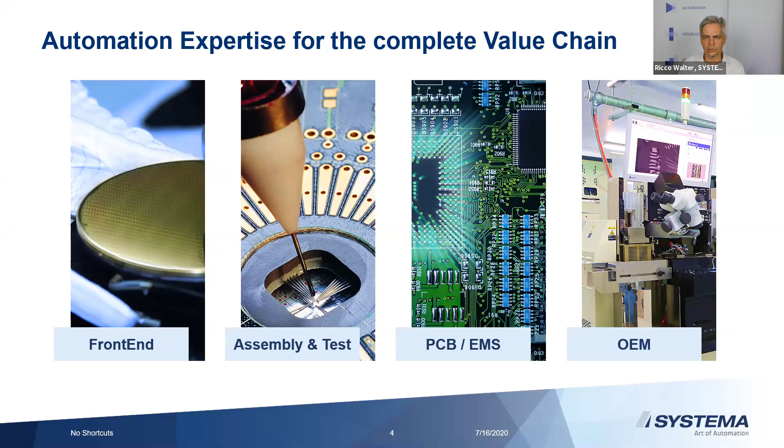Having said that, Systema was born really in the front end of manufacturing. We started and learned the hard way and climbed the ladder, moving to other areas like assembly and test, the back end. Then even further on to PCB and electronic manufacturing services, and finally also supporting equipment suppliers around the world with sophisticated automation. So everybody at the moment is talking about revolution.

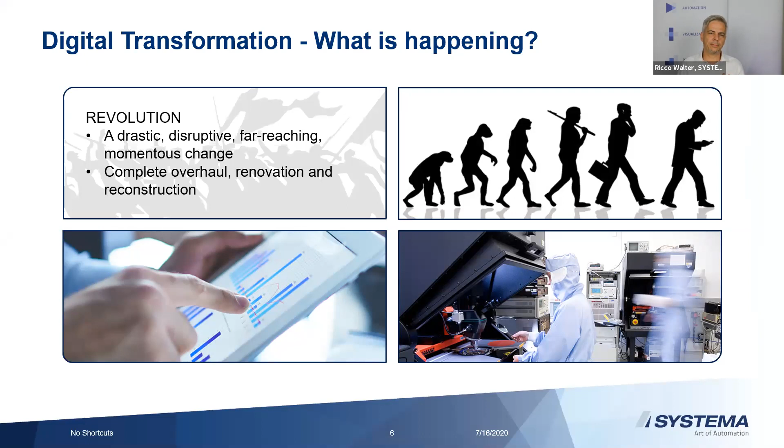I'm a bit careful about it. Let's get a little bit deeper into what's going on. No doubt there is digital transformation going on, with a speed and power which is simply overwhelming. If we talk about revolution, we talk about a drastic change. Things are really experiencing a complete overhaul, a deconstruction and a reconstruction. This is something very dramatic.

Well, an evolution is more a gradual change. So you start to adapt, you progress, you improve things in an existing environment, so it takes longer.

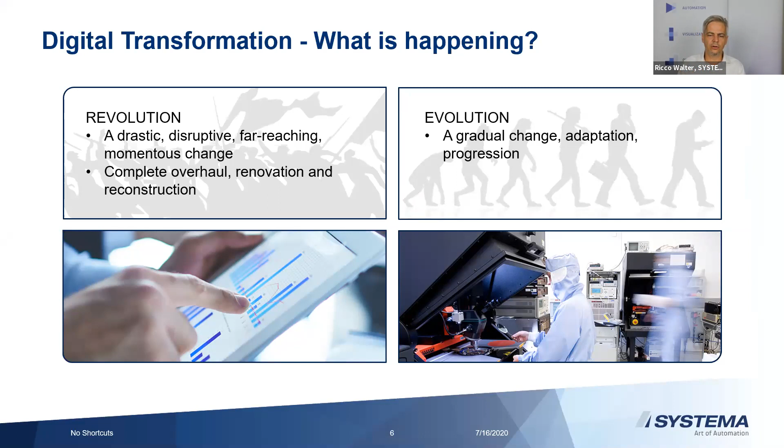And then we have the reality in manufacturing. Basically we have existing fabs and factories. If you go to the shop floor, what you see is people, you see paper, and you see a lot of Excel in there. The worst thing is, you can't simply switch off a factory to do some nice automation work. So everything has to be done in a running factory, which might be hard and challenging.

And we see a lot of temptation right now. Like TK already mentioned, there is really a complete new set of tools and toys like AI, machine learning, IoT stuff. Computing power and storage gets cheap, and that is really a game changer. You can do much more things today than just 5 years ago. Everybody's expecting information at your fingertips. Funny thing about this one is this phrase is from 1994, from Bill Gates giving a speech introducing Windows 95. So already at this time, this was a hot topic.

So what are the challenges we see? Manufacturing has changed dramatically in the last years, and there's a common understanding that the fabs are already too complex to manage or optimize manually anymore. The complexity in the fabs is really increasing, and we see a transformation from mass production to mass customization. Product mix is going up, lot size is going down.

On the other side, to be frank, working in manufacturing is not really sexy. So we have really a challenge to get the right talents in there, and we cannot always rely on the industry veterans who know everything and have been doing everything for the last 30 years. These people are simply retiring.

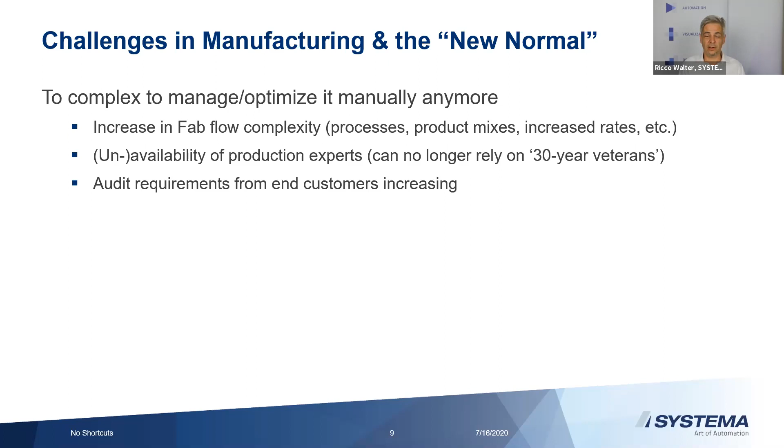Another thing is we see really that the requirements for audit from the end customers of the fabs are increasing dramatically. But this is not the worst part. What is happening right now is that the COVID situation is a big boost for digital transformation.

Simply, all of a sudden, you can't have all these operators on the shop floor. So people are missing who were doing a lot of work there. And working from home means you have to monitor and control your manufacturing remotely. This is really mission critical.

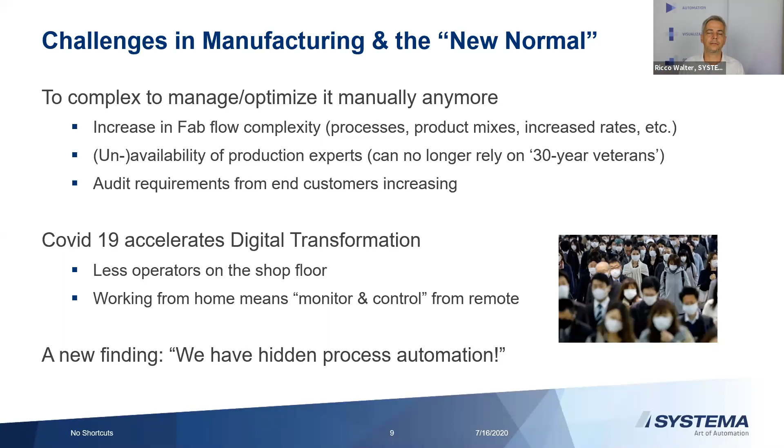What we see from our customers and the feedback we get is really a finding of, holy cow, we have hidden process automation. If you go to the shop floor and watch the operators and engineers carefully, you see they're doing something which is never documented, not really in the MES or other systems, because they have the expertise. They're waiting for the next lot, which they see at the previous process step, and so on. This is something you have to keep in mind if you really want to do automation.

So what's the talk of the town? Let's take a short look. Bing, there is some light. What is this light standing for? People are talking about the lights-out fab. Don't get this wrong, we had slides about the lights-out fab in our vision 20 years ago, and people were just like, yeah, that is the future. Today, this is happening and it's accepted. This is really a big game changer for everything we are doing and also what our customers are doing.

So what do we have to do? Of course, it all starts with integration. If you want to automate and finally get to the point that you can turn off the lights, you have to integrate the shop floor. And integration really means not only the equipment. Integration on the shop floor always includes different parties.

Equipment for process and measurement, that's understood, so everybody does that. But if you want to go into real automation, you also have to integrate transport and storage devices. You have to integrate all the toolings you need for the process. You have to bring the puzzle pieces together from the MES, if you have a dispatching component, recipe management, SPC, run-to-run control, whatever is needed. But don't forget the operator. There are people on the shop floor, and to make sure the manufacturing runs smooth, you have to integrate them. And of course material, not only the lots, but also all the direct and indirect materials.

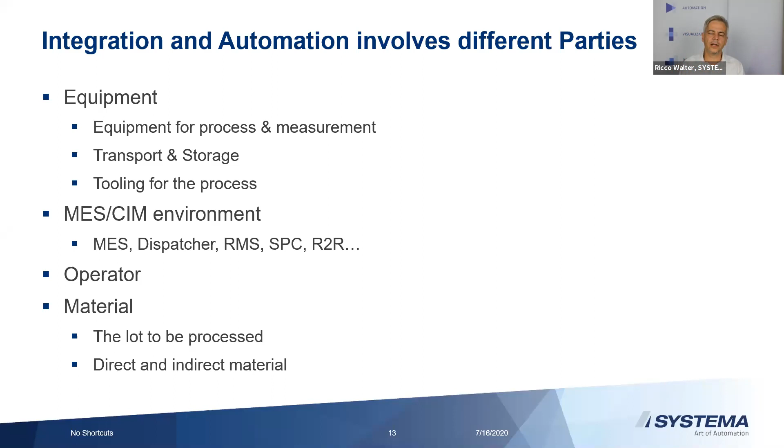So let's take the perspective of the shop floor. This is how it looks like in a lot of shop floors around the world, in Asia, wherever.

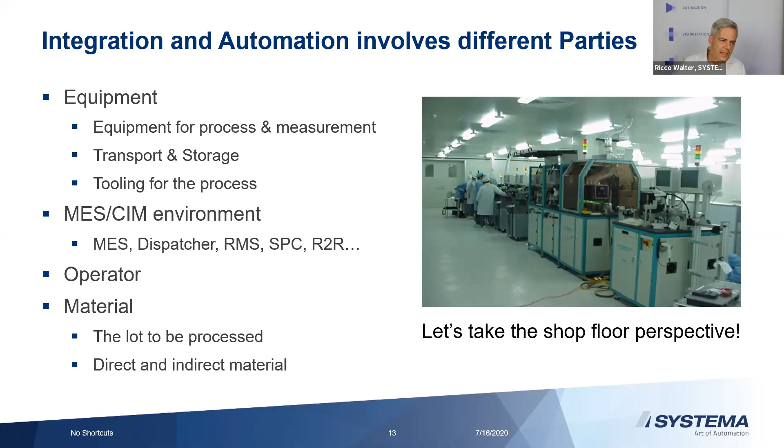So let's look from the shop floor how automation looks like. You have a lot of tools there. You have some people walking around there. You have readers, you have the material down there. And above you have a fuzzy thing, a cloud.

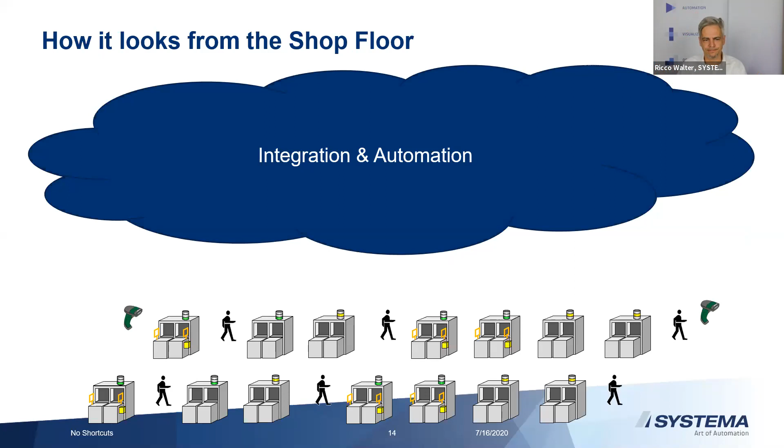So with all the automation integration in there, what you always see on the shop floor are the operator GUIs, the graphical user interfaces, where they get their instructions, type in things. This is always a given, this is always existing. In the better case, you already have machines integrated in a basic mode, so you can read information from the machines, get data, but perhaps not control it or optimize it. And in the best case, you have machines really tightly integrated with the ability to set up recipe parameters, do some remote control, and really be prepared for high automation.

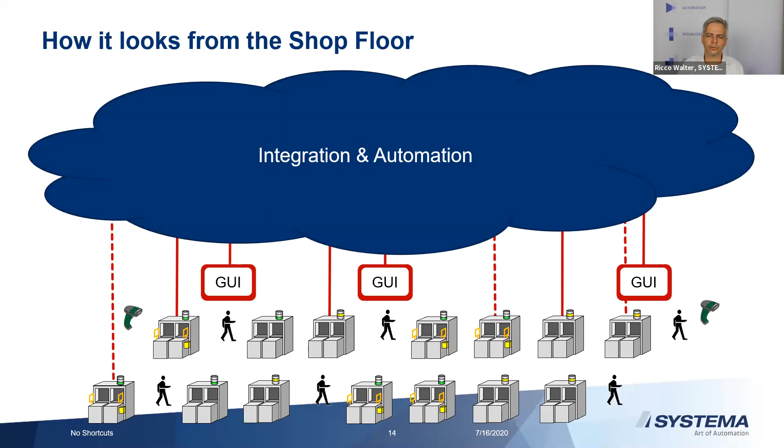But don't forget, such a standard shop floor GUI can do a lot of things for you if it is done well and integrated tightly into the MES. First of all, there's a golden rule: an operator should never search for anything, should not search for what is the next lot, what is my next recipe, what is the state of my tool, and so on. This should be provided via the GUI.

Of course, it has to be integrated into the MES, for the WIP tracking, so you can also integrate some ID readers in there. You can integrate it into recipe management, even though there are still some gaps if you can't control whether the operator really selected the right recipe. You can integrate it into plant maintenance, and you can already feed a simple version of the digital twin for the equipment. And what does it mean?

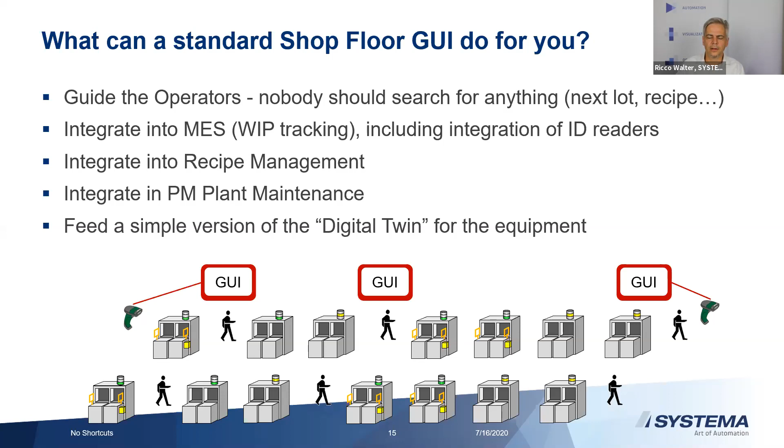Just let's take a look behind the scenes. This is what we call an automation layer. There are different ways of how you can do this, but this is always the backbone of all the automation you have to do in the fab. You see the GUIs connected in there.

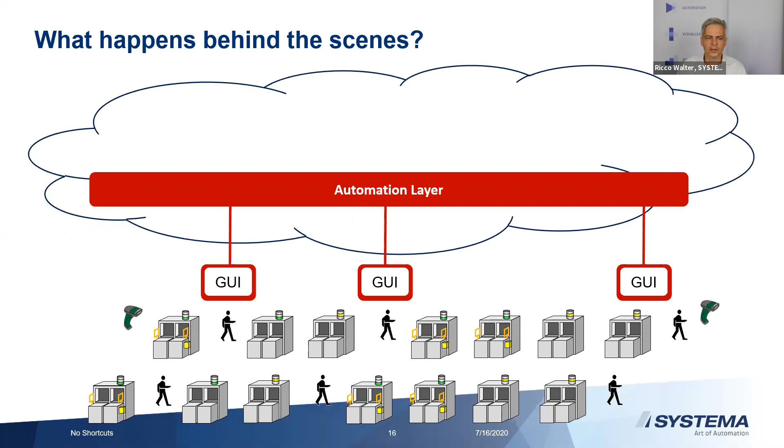And then start to build a digital twin of each and every piece of equipment you have in there. Why is that? Just imagine you already have these digital twins. You can set up the process parameters, update the state models, take care of maintenance and so on.

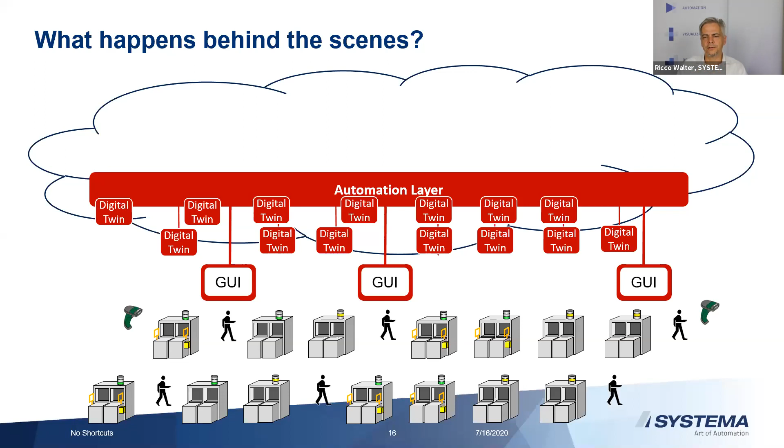And you start to do integration. Of course, you have all your components for standard operation, tracking, recipe management, perhaps also dispatching, engineering data collection, and so on, connected to the automation layer.

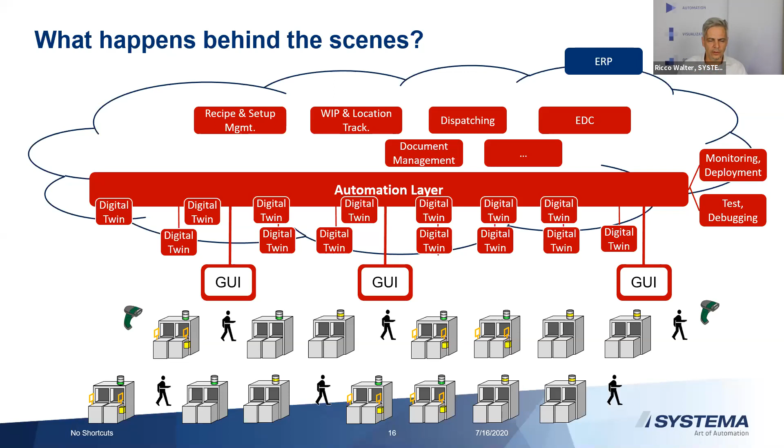So now you want to integrate tools. What you do is extend the existing digital twin to the shop floor and start with data collection. You don't have to change anything up here in the automation layer. You just have to expand the single digital twins, add more functionality, add physical interfaces, extend the state models in there for data collection and so on.

And you can also do the same with full integration, really control the machine, set up recipes, parameters, and so on, do a remote control start. This is the architecture to do some automation.

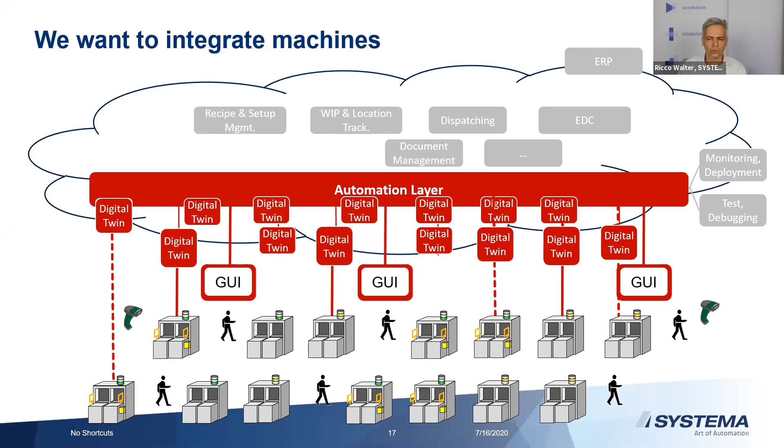Some of the guidelines and rules we learned during all these projects we did in the semiconductor industry around the world: having the right architecture is really mission critical. That means you have to have really clear encapsulated function modules. Why is that? If you are able to separate functionalities with clear interfaces, this makes migration or extension of functionality much, much easier. So everything communicates via standardized interfaces on a standardized bus with each other and can be extended.

Very important, this is often a challenge we see on the shop floor: decouple the user interfaces from logic. Avoid these kind of fat customized clients in the shop floor. This is a nightmare in terms of central management of all these components, updating things, changing some business processes in there. Try to avoid this.

And if you're talking really about a bigger fab, you have to have a reliable automation architecture. That really means, don't get confused by it. You don't need to have a PC for every piece of equipment. That's not needed. You have to make sure that everything you deploy in the fab can really be done from a central position, so you can maintain it, you can update it.

So don't walk around on the shop floor with a USB stick and do updates there. That's impossible, you die of all the work in there. That also means you have to have a set of monitoring tools to test and debug all the applications you have in there, and you have to make sure with this kind of automation architecture you really can extend the functionality step by step in a running fab.

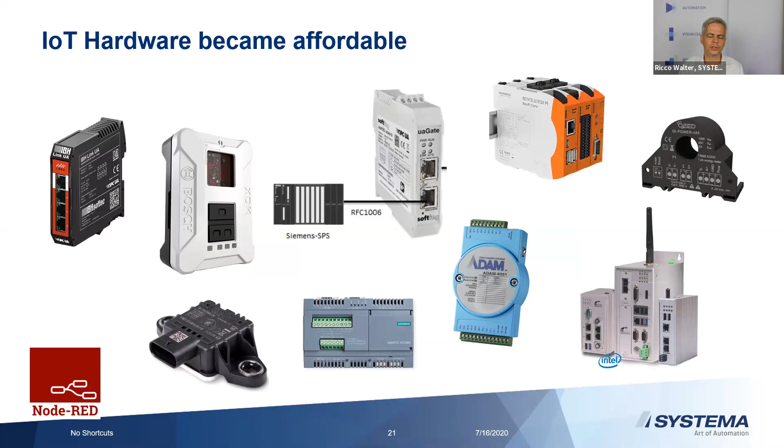What is really good news is that all this hardware is affordable. You can even play around a bit, and if it turns out it's not really the thing you like, you can just get rid of it and try something else. So this is not a big investment any longer to implement IoT, to integrate things on the shop floor. And even more, to integrate this by software, this is no rocket science any longer.

You have stuff like, for instance, Node-RED. This is open source, you can really click, drag, and drop functionalities. And it already serves a lot of purposes, not highly sophisticated automation, but to start with and get your tools integrated into the system to see what they're doing, and also to collect data and do all these nice analytics. This is a perfect starting point.

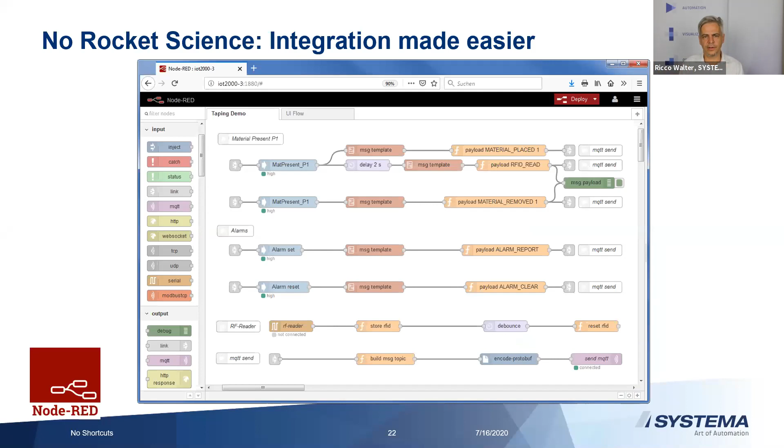Automation's worst enemy is paper. Paper blocks automation. So the guideline is get rid of paper. And paperless has quite some consequences if you do it right.

The first thing is, paper should not carry any information for the lot and traveling with the lot. If you have that, you have a problem with the automation.

But it can be even worse. If the operators or engineers start to write information on paper on the shop floor to collect data, then you are in even deeper trouble. And the worst thing which has happened, never execute handwritten information in your manufacturing. Just imagine you have an order and have to prove what's happening, and the operators are passing information from one station to the other on paper, which is executed and never documented in the system, never traced, never tracked. This is mission critical. You have to avoid that.

But you have to have a migration path. At the beginning, there's human interaction needed. But you have to make sure that all the relevant information is really in the MES or other applications. So everything you need to execute a lot, to collect the data, has to be in your automated systems and the automation software. And of course, if there are still humans involved, there must be enough user interfaces in there to interact with the system so that they can see what they have to do and that they can also type in information about incidents and so on.

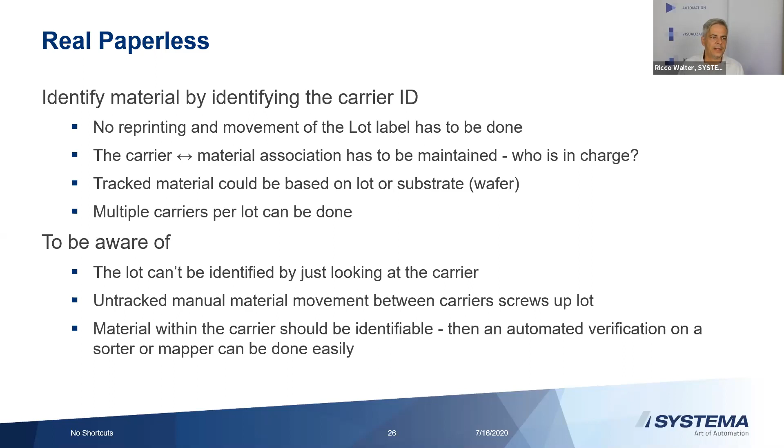TK had already touched a very interesting point, fortunately I don't have to go too deep into this one: advanced analytics. To do advanced analytics, you have to start to get rid of the data silos you have in manufacturing. If you look at today's shop floor, you have a lot of different data sources, and a lot of silos of information where this data is accumulated, maintained, and used to analyze, but these are silos with no relationship to each other. To do this integration for all these silos and transform this into a single version of truth, data integration is really key to implementing all these new tools for advanced manufacturing analytics.

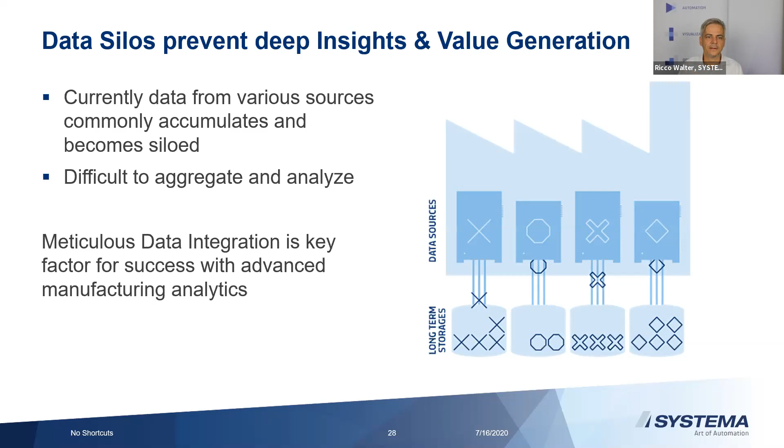And this means data integration is key. If you're just looking at the picture with the different sources of information and different symbols, you have to find mechanisms to aggregate and enrich the data you get from the different sources with context information, and also to relate the information to each other to make powerful analytics really possible.

So this is something you have to do. There's a lot of work. It's often underestimated because this is under the water. This is the work you have to do to get the shiny things on top of it, the great analytics and usage of the tools today.

And really to apply these analytical capabilities. But if you are able to do this, you really have the chance not only to gain very deep insights into the current state of your production, but also start with forecasting, start to optimize processes, get the root cause of challenges, look back in the past, what was happening? Was there any similarity with what's happening today? So this is really mission critical if you want to apply these new machine learning AI technologies. You have to have a single version of truth for the data you get from your shop floor.

Last thing, hands-free manufacturing. It's amazing. I never imagined that something like this will happen also at the assembly and test or subcons in the shop floor, but this is now happening and this is a real challenge. And if you're talking about hands-free manufacturing, we're really talking about the art of automation. Because if you do this, if you automate the shop floor completely and try to reduce the number of people or really turn off the lights, this needs a really comprehensive approach.

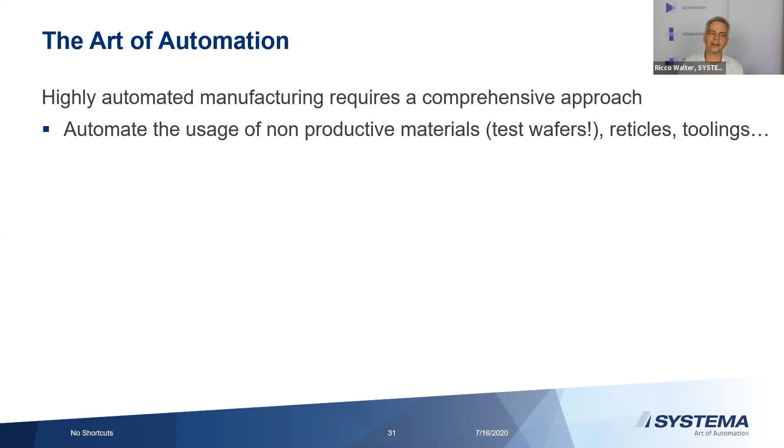You have to take care for new product introduction, for experiments you want to run on the shop floor, in a dark room, no people. That is a real challenge. Even more, there are activities which are now getting into consideration, which were never in scope before. Just let me give you an example.

You have an inline machine, so there is a lot coming to the input port, gets loaded, the material gets unloaded and goes through the machine, gets processed. So all of a sudden you have an empty box at the input of the machine. Right now there is no automation component, so MES doesn't take care for empty boxes, to take away this empty box on the one hand side, and also no component to make sure that there's another empty box on the output of the machine. MES doesn't do that. You need something else for that.

And even worse, if you move the lot from the one box to the other box, the relationship between the lot itself and the container changes. So you have to track this and maintain this. And also your machines have to be able to inform you about it. That can be very challenging. You have to think about it before you start doing it.

Unfortunately, clash of cultures. German engineering, Asian focus on chances. And that's really a big game. The happy path is fairly easy, and that's what people love to talk about and think about. But the reality is, if you go into deep automation, you really have to think about error handling. And this can be extremely expensive and challenging to really do an error-proof manufacturing. That takes a lot of effort to think about, to create the right mechanisms, state models, flows, to take care for errors.

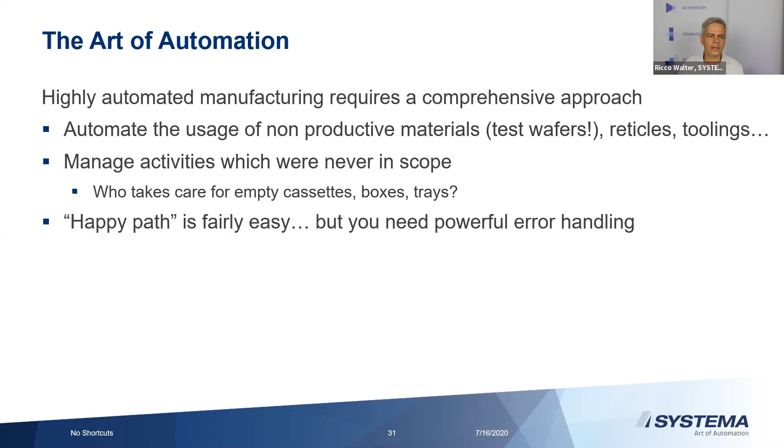And whatever you do, you can spend a lot of effort to become fully automated. You will get into problems if you have a lot of different automation components working on your shop floor. To analyze them and tackle them, you really need new skills. We learned this also the hard way at some of our customers. Get familiar with tools like Elasticsearch, which allow you to monitor and search in a lot of different data sources on the shop floor to find out what is the root cause for the problem.

The human factor is often underestimated. If you do automation, if you do Industry 4.0, you have to have a lot of stakeholders which should contribute and align. And this is not only the automation department, it's definitely not the IT department. So this kind of digital transformation is not an IT topic, it's really on the operations and all the other departments.

Without that, we see projects failing because companies suddenly realize, holy cow, we have to include a lot of different parties and we cannot agree on things. Last but not least, things can't be successful without strong support from the top management. If there is no strong commitment from the top management, it is impossible. You cannot win.

There's no doubt about it. This has to be done. Fortunately, we get this from our customers. Sometimes there's quite some fighting and also a learning curve about it, but top management has to be involved.

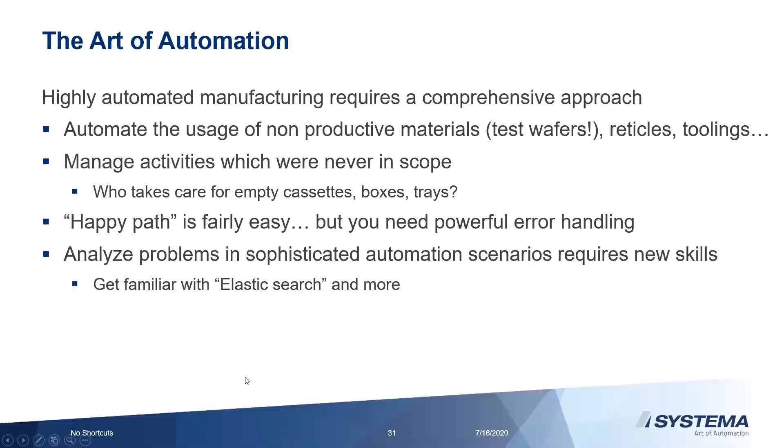Hey, I wanted to go back to page 29 because I had a question about execution. There's really 2 parts to this data ingestion. The first is, I look at it as very mechanical, just figure out how to get all the data. I think a lot of companies are doing this, my company as well. I think the real challenge is, how do you go from getting all of this data to turning that data into useful information?

What skills are necessary? How long does it usually take before you start seeing the benefit of collecting the data and turning it into information?

Yeah, that's an excellent question. Unfortunately, it's not an easy one. That's why I'm struggling with it. Yeah, and you're not alone. This is really a common challenge for a lot of fabs we are working with.

One of the things we learned is it's not enough to just have an understanding of the new technologies, let's say how you collect data or how you really get data. What you have to have is an understanding of what the data is about. Without expertise on the process and what's going on the shop floor, it's very difficult to make the relationship. So we have an extra department in our companies, guys from the industry who are taking care of this, and they're having strong expertise really on what this information is about. How long it takes is even more difficult to answer.

I have a lot of confidence that my staff understands what the data is telling them. But to go to the next step, to turn that data into actionable information, I think requires skills that generally semiconductor process engineers and equipment engineers don't have.